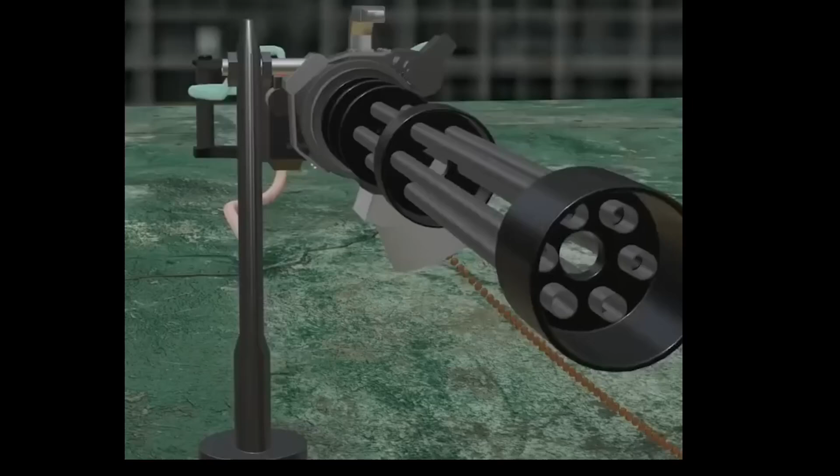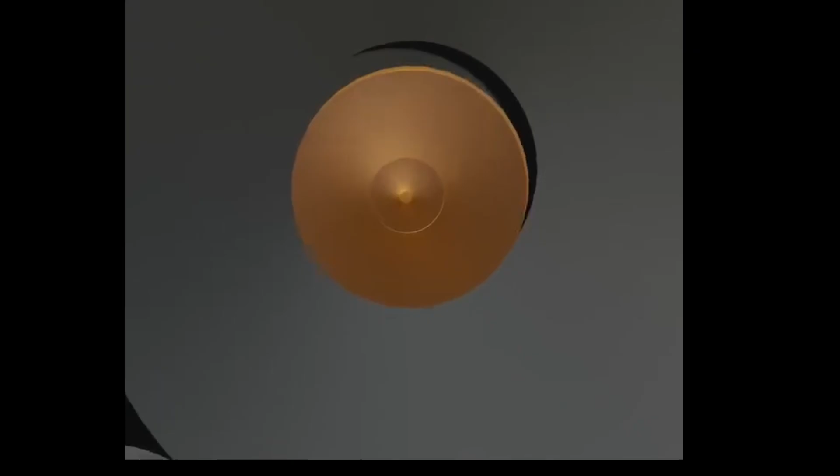You've seen it on gunships. You've seen it on Humvees. You've witnessed its absolute power in movies and video games. But how well do you understand this military hardware? From a quick look, the M134 is easily recognized from its rotating barrels during firing. We'll talk about this later in the video.

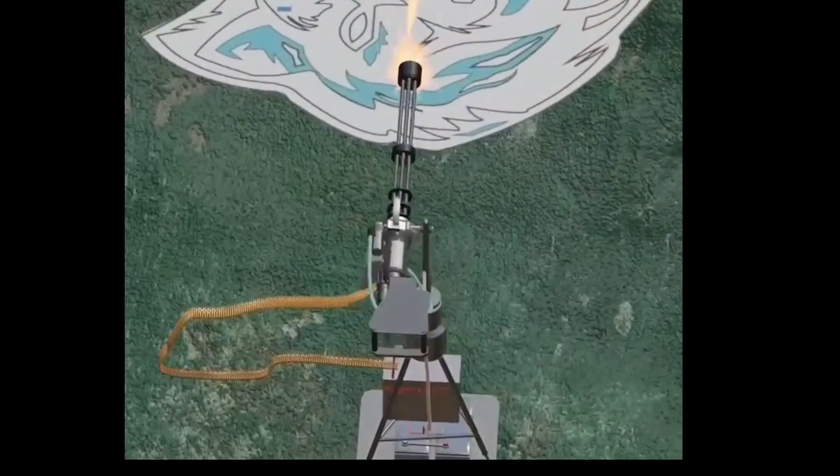Now, this design is based on the principle of its larger-sized predecessor, the Gatling gun. But its operation makes this machine gun even more fascinating. Before we jump into the inner workings, let's mention the basic components.

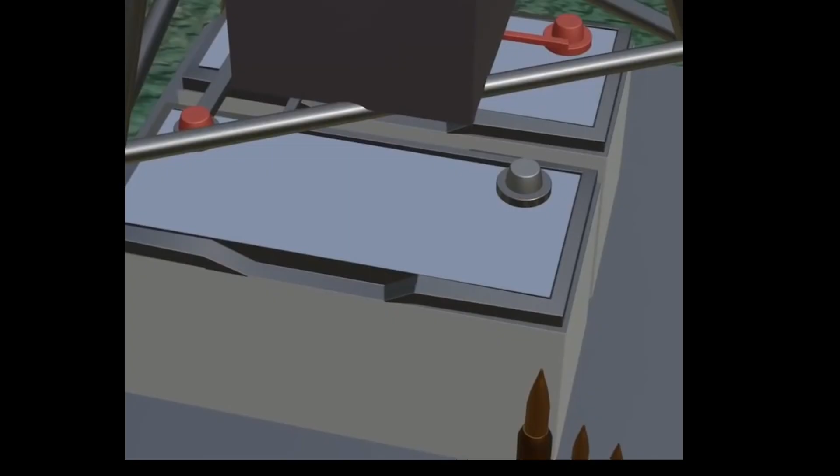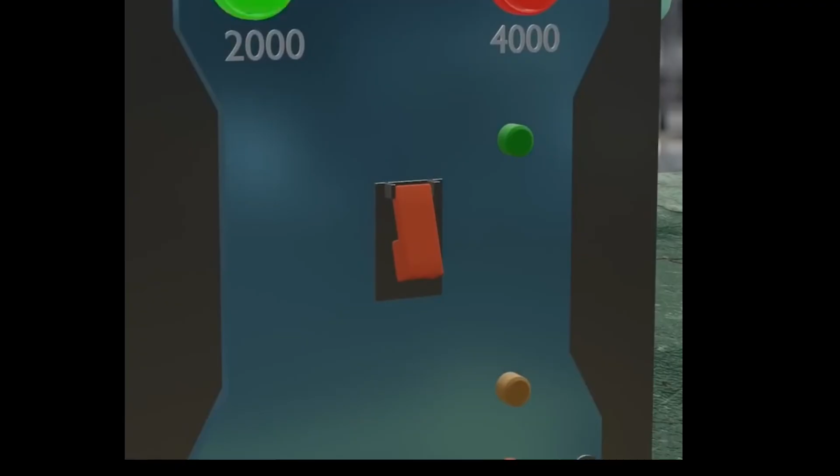The M134 consists of 6 barrels, a barrel clamp assembly, a rotor assembly, 6 bolt assemblies, 6 removable bolt tracks, a gun housing assembly, a safing sector, a rear gun support, a housing cover, and 2 quick release pins.

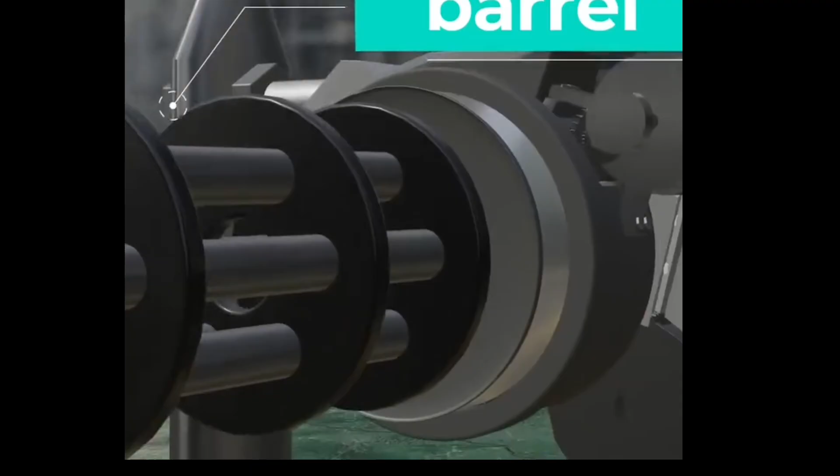Each barrel is 22 inches long, evenly spaced and mounted around a central axis in a circular pattern. A barrel clamp holds these barrels in place as they sit in the stationary housing cover. While this design primarily prevents the barrels from overheating while firing, it also increases the gun's firing rate. We'll look at these in more detail later in the video.

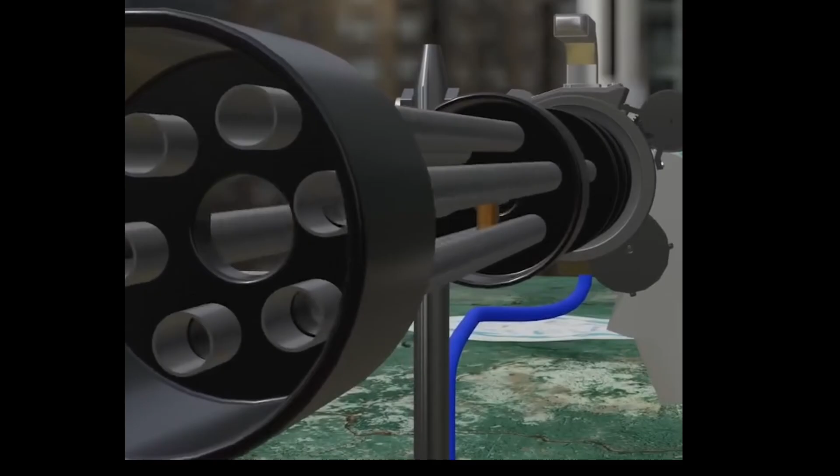Ever wonder how the M134 spins while firing? It's because of the motors. This rotor assembly is usually powered externally by a battery, though some designs may be hydraulic or pneumatic. The barrels are aligned with the bolt assembly, which follows the housing cover's main cam path. So as the rotor spins the barrels, the bolt assemblies move along the accommodating tracks.

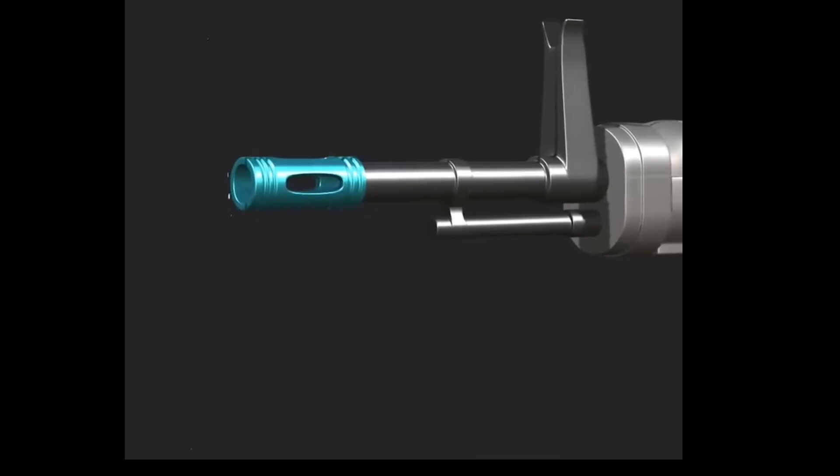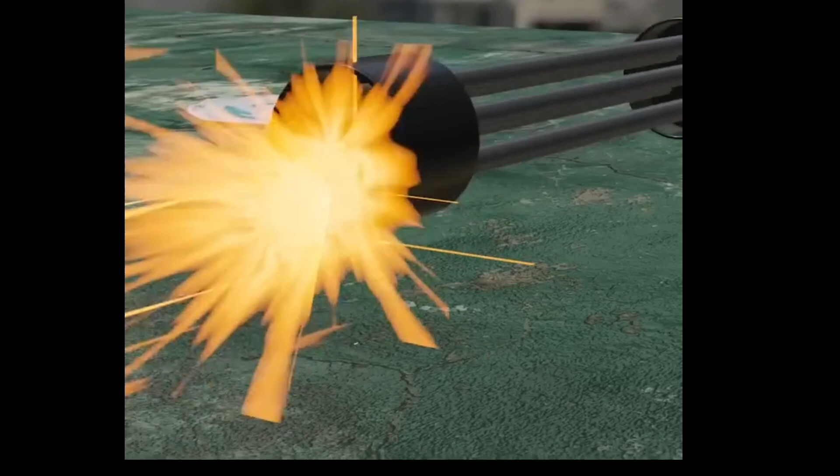Ammunition is usually belt-fed from a linked ammo box into the M134, so its rate of firing is steady and sustained. The machine gun uses standard 7.62 by 51mm NATO rounds. The rotating mechanism combined with its 6-barrel design allows the weapon to maintain sustained reloading as it fires.

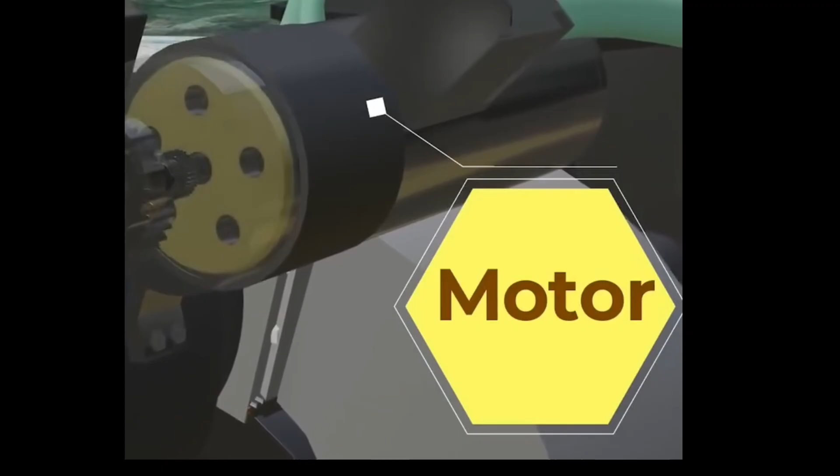As the barrels rotate, a separate motor rotates the belts in an opposite direction, steadily feeding the firing chamber with rounds. So as one barrel fires, 2 are extracting shells while the remaining 3 are being loaded.

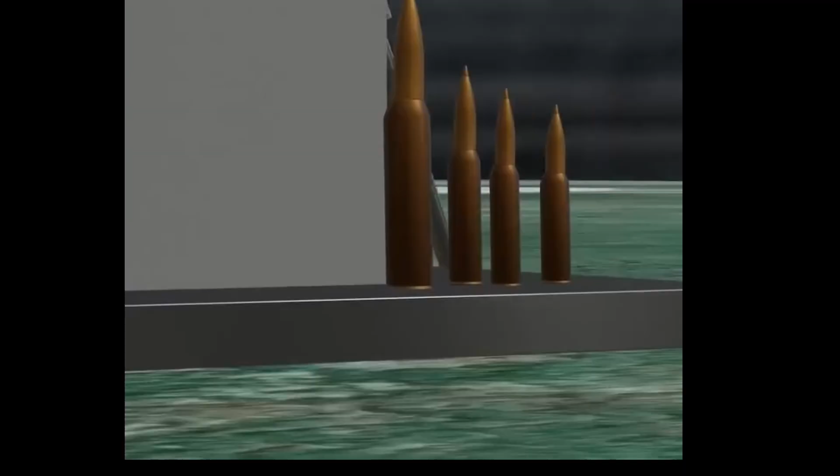But you must have wondered, if the rounds are linked, how do they enter the barrels unlinked? Well, as the rounds are fed into the chamber, a delinking device unclasps the link that holds them in place, and it dispenses them out along with the spent shells as the machine gun fires. Kinda like what happened in The Matrix.

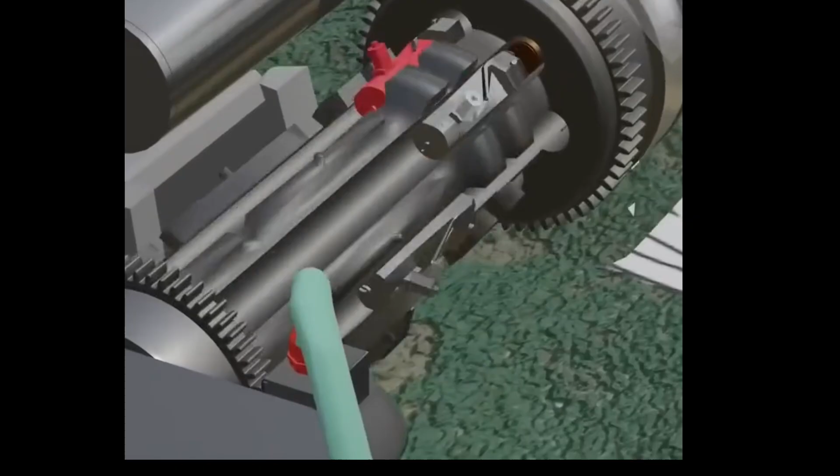Each M134 features a grip with triggers that activate the barrel's rotation and firing sequence. During rotation, each barrel is fed around from the ammo belt and moves to align with the firing chamber. Once positioned, an electrically driven firing pin is activated, which strikes the cartridge's primer. This ignites the propellant in the cartridge, forcing a burst of gas to push the bullet through the barrel.

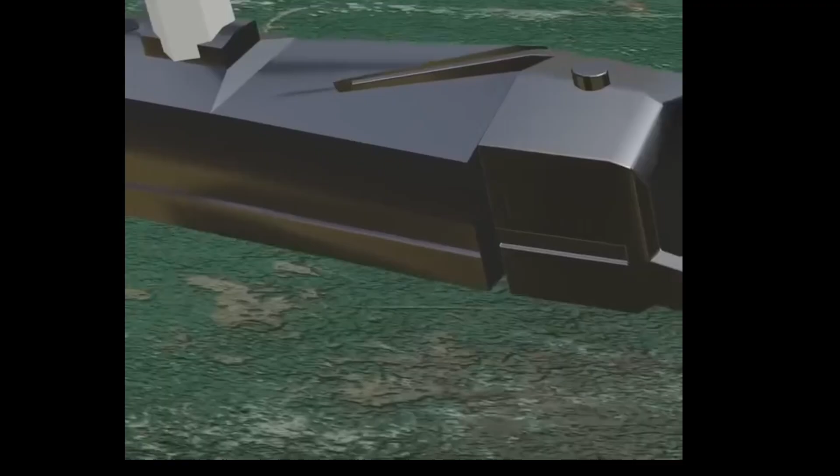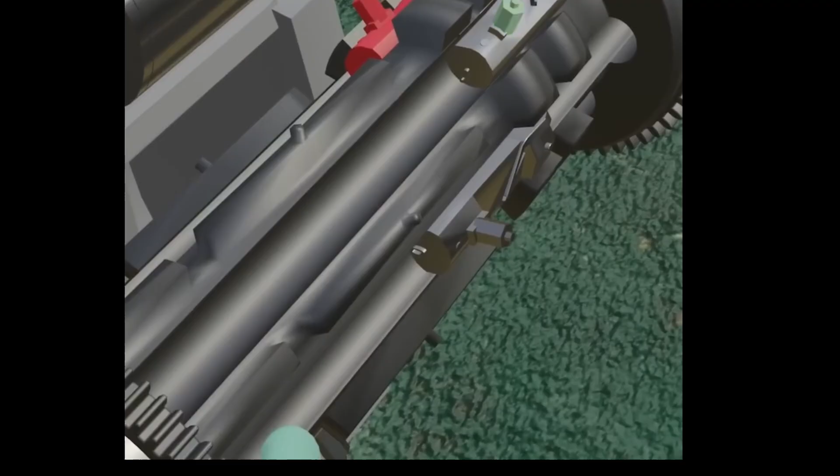As long as the trigger's held, the process continues at an impressive high speed, releasing a barrage of rounds upon the target. But how does the weapon address firing safety? Well, the M134 also features a safety firing solenoid that controls the pin's activation. Also included are safety interlocks so the weapon doesn't fire if it isn't properly assembled.

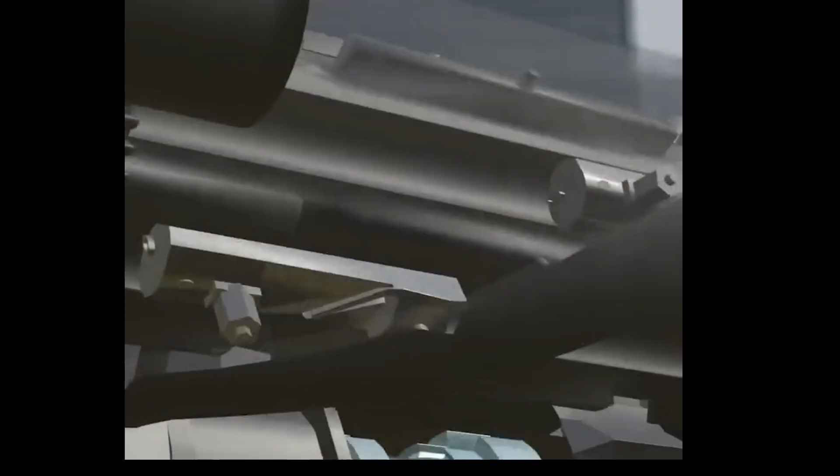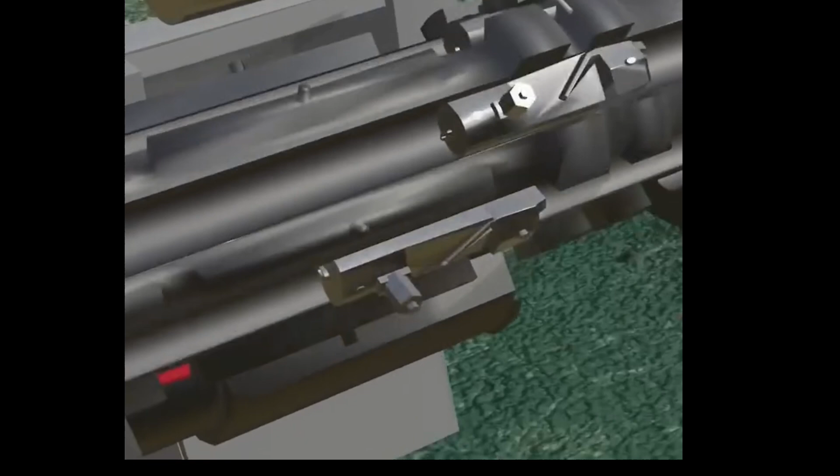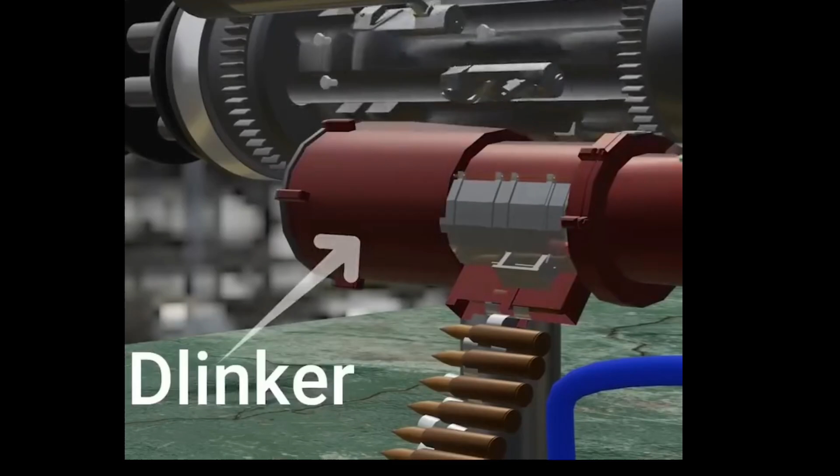Its rotary operation and 6-barrel structure give the M134 an incredible firing rate of 6,000 rounds per minute. To put it in context, the minigun shoots 100 rounds every second, but its firing rate can also be adjusted to as low as 2,000 rounds per minute to suit various combat purposes. How is this done, you ask? Well, the motor's speed must be adjusted before firing so an operator can choose between a rapid rain of bullets and a slow burst of rounds.

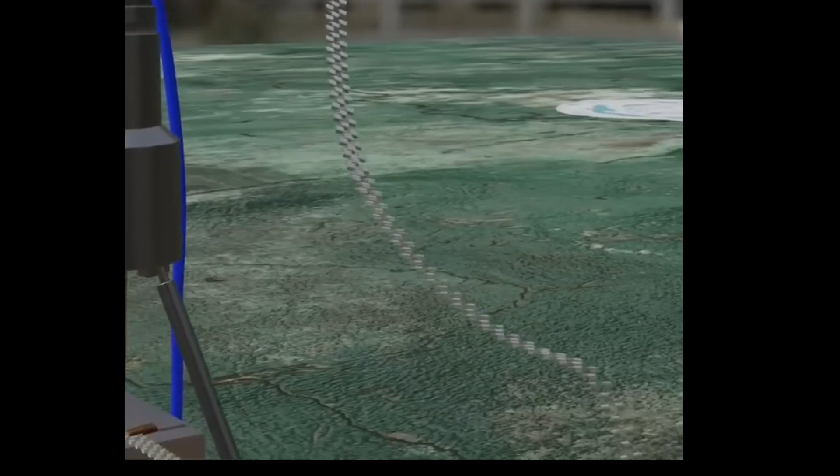Firing such a massive rate of bullets can eventually cause any weapon to overheat. So how does the M134 solve this problem? Through cooling fins on its barrels, the minigun creates airflow as it spins, transferring heat away from its system. This is why it can be fired for an extensive period without worrying about overheating. So the next time you see an M134 in action, you'll know how it works.